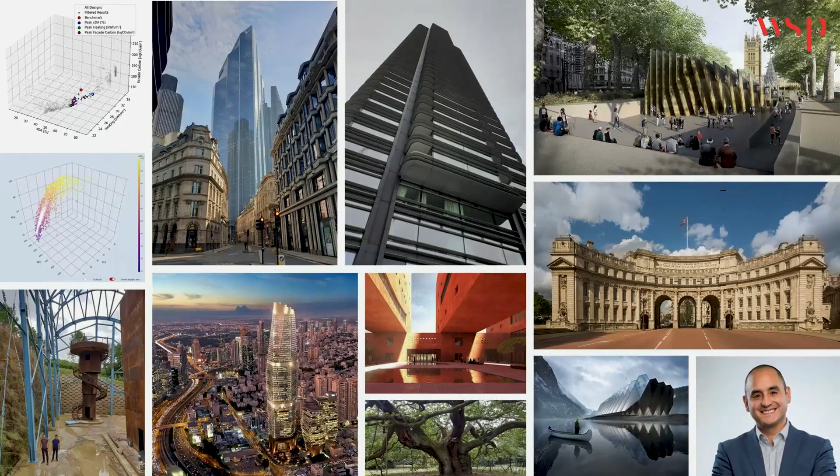A little bit about myself. I'm a structural engineer. I work on tall buildings in the UK and in the Middle East. My experience is very diverse, different types of buildings, all the way from the most complex to the smallest projects.

At the bottom of your screen, you see a tiny little tree. That is possibly one of the most challenging projects I've worked on. It is a 1,000-year-old oak tree in Liverpool that needed propping and supports to make sure that it could stand up for the next 200 years. And that was more complex than any tall building I had ever designed before.

For the last 5 years, I've led WSP Structures decarbonisation efforts. So we realized that the real impact that we could make as designers was in the emissions from the buildings that we design. Everyone is focused on their own carbon footprint. This is what we call a carbon handprint - what you can design for a client. We realized that that is where we could make the biggest impact, and I've been leading that.

One of the things that we created as part of this journey is a process, a digital process that I'm going to show you today. And then that got me into creating tools to decarbonize our buildings and to help engineers create better buildings and do better processes.

And that is how I got into automation and AI. So hopefully today I'll tell you a bit about all of those things so that you can see how automation, AI are already changing our industry. It's such a fascinating industry, and it's incredible because we can really make a difference. The buildings that we design, the buildings that we create, they change cities, they change people, they change lives, they change us in return. And it's important that we realize how impactful this can be.

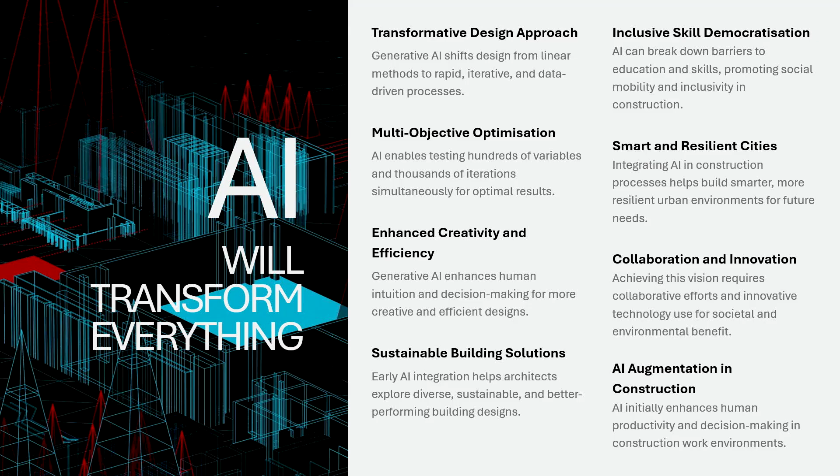At the same time, it is something that will democratize access to skills, because more people will have access to similar skills, which means that we can build things together. So it's something that is already changing how we do things, and we have to embrace the power of being able to iterate and optimize something at an early stage. Today, during this talk, I'll talk to you through how we are optimizing buildings from an early stage to create the most efficient solution. It's going to change how we build things as well.

If you combine the power of automation, the power of AI, and the power of robotics, we could really challenge all those construction paradigms that we have right now. I once read a really interesting prediction that someone said that by 2040, we would have robots with human dexterity at the price of a microwave. If that is true, then that means that the construction industry will be completely transformed, since we have that different workforce that can do buildings in a different way.

The challenge, though, is how do we respond and how do we adapt quickly enough, but also making sure that these changes come with consideration to people, consideration to the processes that we follow, to health and safety, well-being, etc. It's important that we remember that when we think about automation and AI, we need to think about upskilling, not de-skilling. So thinking about AI as a tool that can help us enhance our intelligence, which is why today's talk is called Augmented Intelligence. It is about people, and it's about augmenting what we can do to deliver better projects.

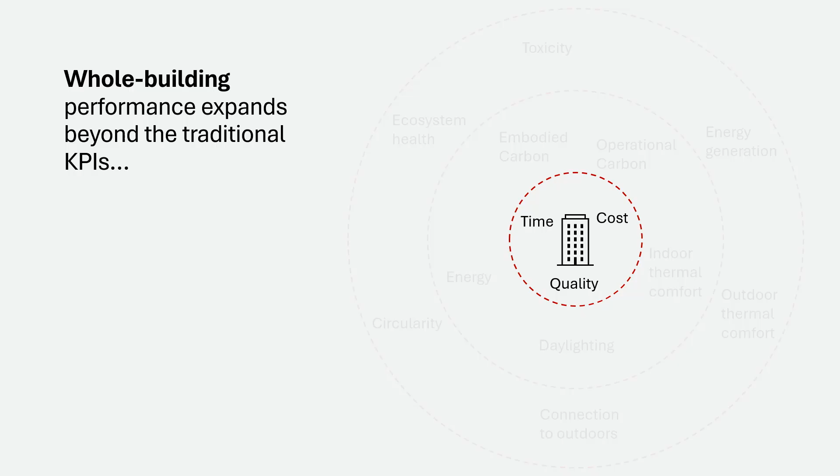Let me tell you something. The current context in design and construction has to go beyond that. Our clients now expect buildings not only that have good quality, that can be delivered in good time, and also have a cost that is good.

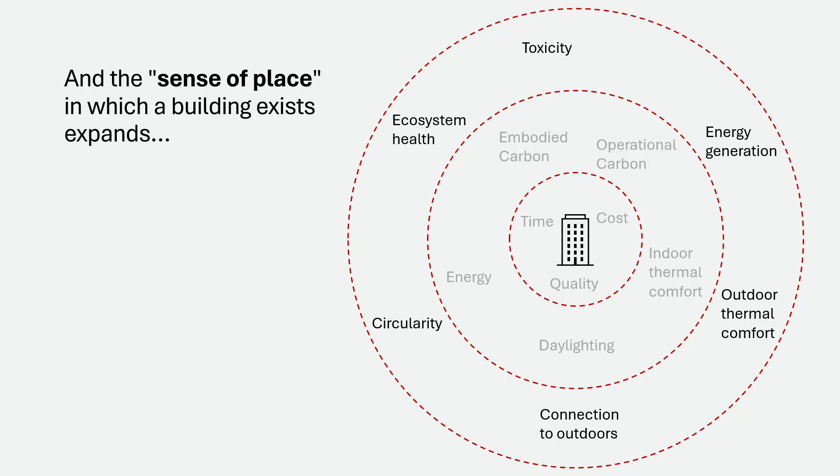They also expect us to perform in terms of other building scale KPIs, such as embodied carbon, operational carbon, building performance items. But even beyond that, which is about place-making concepts such as circularity, thermal comfort, and connection to the outdoors. Our clients are expecting us to create buildings that achieve all of those KPIs simultaneously, and they are all interconnected. That is the challenge of building design.

I'm going to pause here for a moment to ask you a question to think about when you think about building design. I know you might not be designers, but just pause for a moment and think about what would you do. If you have the same brief, let's say a 20,000 square meter office building, and you are an architect, and the client's brief is design the building with the best amount of daylight.

That is one challenge. Now, some of you will be the structural engineer. Think about being the structural engineer, and the client's brief is, how do you design the most efficient building in terms of concrete, the least amount of materials? And then some of you might want to choose to be the mechanical engineers. Your objective is to optimize this building in terms of energy consumption.

Now, think about, if you are optimizing in your role as an architect, structural engineer, or mechanical engineer, your idea is to optimize those parameters. What will the building look like? So think about that for a few seconds whilst I run this animation.

That is what we did. So we created 3 separate algorithms. This is all about introducing augmented intelligence into the design process. We created 3 algorithms to optimize buildings for those 3 parameters, 3 performance indicators. And of course, as you might suspect, the results are completely different.

And this was the eureka moment, when we realized that if you look at the building on the left, it looks like this because to optimize daylight across the floor plan, you have to have a narrow floor that you can get daylight into the depths of. And because you want this narrow floor plan, you will have to build up, and then you have a tower. It looks like a tower.

If you are the structural engineer and you want to optimize in terms of materials, the one on the right is the one that will use the least amount of concrete. Shallow foundations, it is almost like a campus-style building. But is that good for daylight? Surely you don't get any daylight in the center of a floor plan. And it's not very good for energy either, because you get all these solar gains on the roof.

And if you're optimizing only for energy, you want to isolate the building completely from all the elements. So then you end up with a basement box, completely isolated, no thermal losses. But this building is not very good as a building. It's not very good as an office building. It hasn't got very good daylight. And in terms of embodied carbon, using concrete, basements use a lot more concrete, a lot more materials than the other options.

So what this is showing us is that the design process, if done in isolation, if optimization is done in isolation, it leads to different outcomes. That means that the three main disciplines in building design, architecture, structure, and building services, constantly pull in completely different, completely opposite directions. That is the challenge of building design. How do you bring these disciplines together?

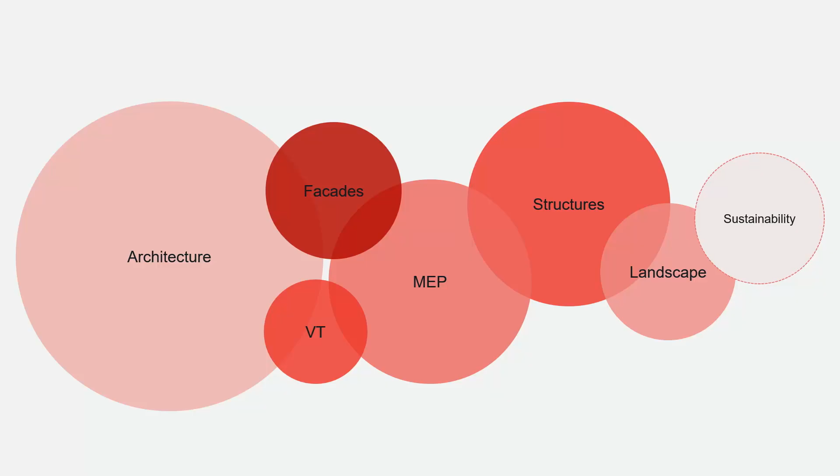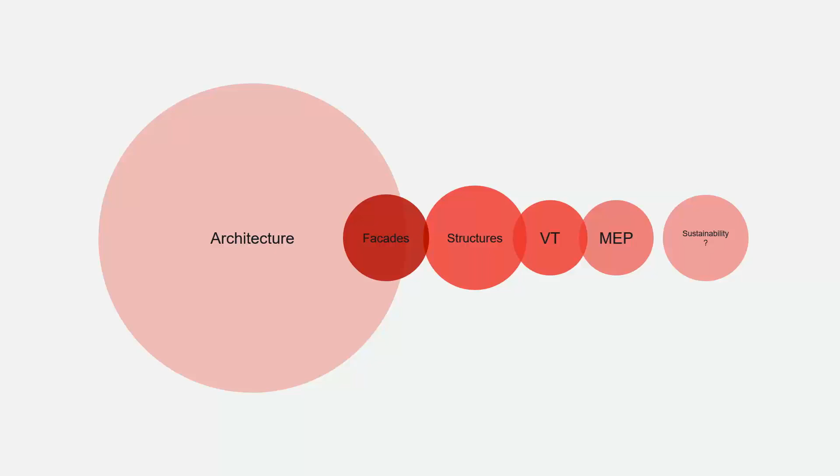A typical design process looks a bit like this, where one discipline comes before the other ones. And this is why buildings look the way they look, because decisions are made almost in a sequential way, and one decision follows the other. Actually, normally, it looks a bit more like this, where one discipline is the central one that drives most of these decisions. So with this linear decision-making process, trying to optimize a certain variable is actually a real challenge. And when you try to optimize one, you might find that the others actually are impacted negatively.

So what is the solution? So what we thought as a multidisciplinary design firm was, we need to optimize buildings for more than one variable simultaneously. And this is what led to this transformation. This is what we created a couple of years ago that has really changed how we design every building. We combine those three algorithms. And those three algorithms are now testing for each combination.

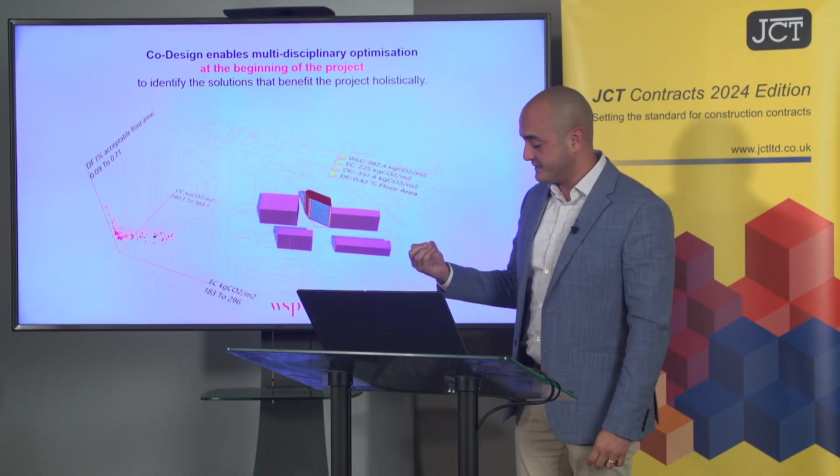It's generating a different massing, a different shape for the building, as you can see on screen—different shape, different type of window, different size of window, different orientation. Every time each of these volumes or buildings is created, you can evaluate performance in the X, Y, and Z axis.

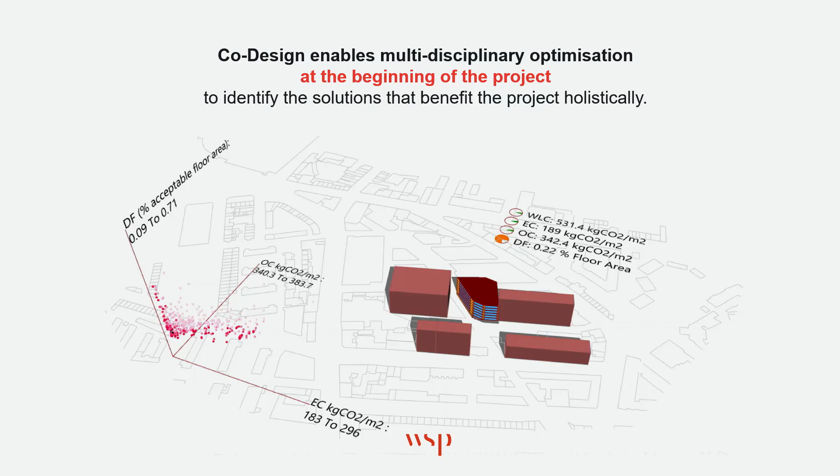In this case, the three objectives we defined were embodied carbon, operational carbon, and the amount of daylight. So we're evaluating a building simultaneously hundreds of times, and this is the key difference. Traditionally, during concept design, that's when we have the least amount of fees, which is why there isn't much science and engineering going into the design process.

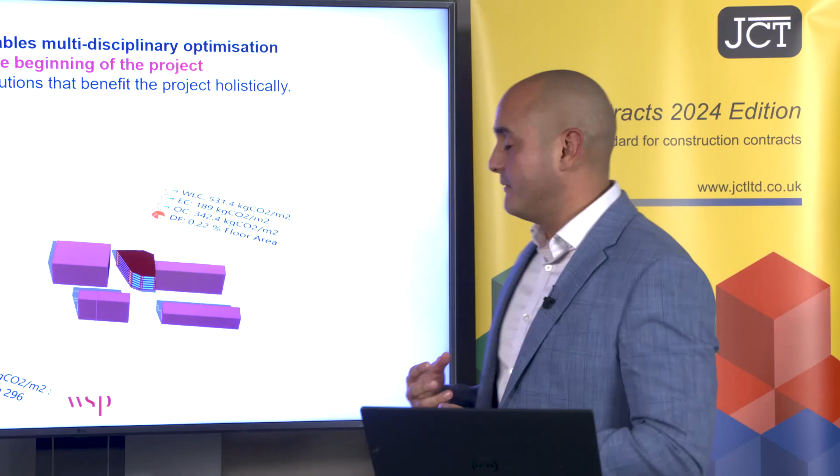So that is restrictive. But with the power of automation, AI, and a few machine learning processes, we can streamline this and create thousands of points of data at an early stage. Each of the dots you see on the bottom left of your screen is a different building that was simulated and analyzed for these parameters—not to the level of detail of a completed building, but to a level good enough to give an indication of how the building will perform for those indicators.

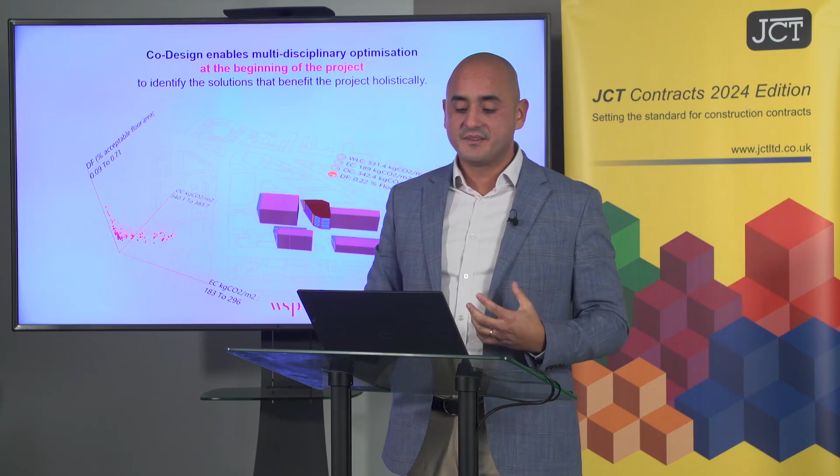And then we bring this to the client and help them see how, by filtering those results, you can achieve the performance that's expected from the brief. Now you have a variety of buildings that can do that. This is what we call the co-design framework.

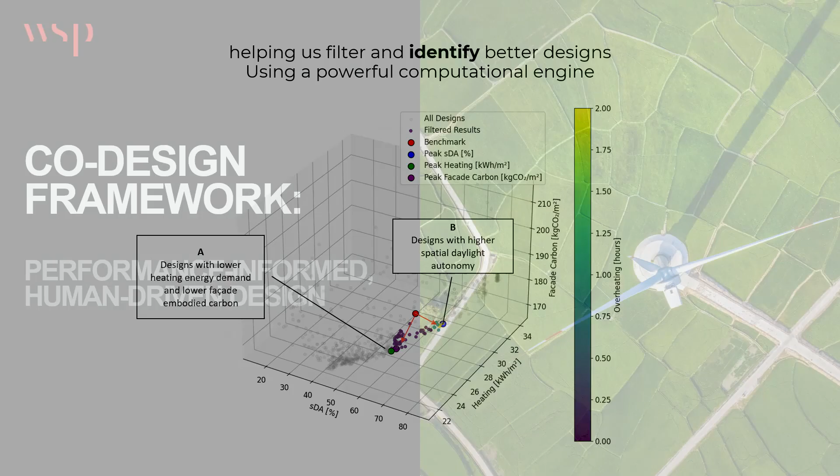The co-design framework is the fundamental behind a design process that is performance informed. This is the key difference between what we are doing now and how concept design was done before. Before, concept design was typically a professional having an idea, coming from experience or judgment. Now what we're using is supporting those ideas with evidence.

So if you allow me to read this, because it's a bit of a mouthful: co-design is a systems-level integrative design approach that unites multiple disciplines to collaboratively address the complexities of whole building performance. In summary, it's about the entire building—not just one discipline, but all the disciplines—and it's about integrating them to evaluate simultaneously and improve the performance of the whole building.

I know it sounds obvious, but it's actually something transformational. And it's founded on three principles: first, multidisciplinary collaboration; second, early stage asset simulation; and third, evidence-based decision making.

In other words, more than one discipline—building services, building structures, architecture. Simulating, so it's not just about intuition and experience, it's about actual computer models that give you the performance of a building in different situations. And third, using all of that data to truly make better decisions.

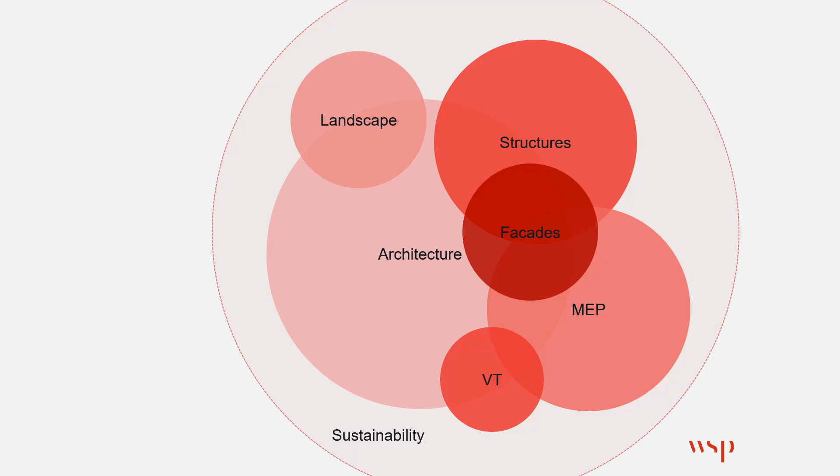So how do we apply this in practice? I'll show you a few designs. The reason this is interesting is because sometimes the impact of one variable on another is not intuitive, and you'll see this—hopefully you can follow me on this simplistic example.

Let me click. So the client's brief was: I have these apartments in this tower and I'm struggling because the daylight assessment for planning is telling me I need bigger windows. And if I create bigger windows, I'm letting more radiation from the sun come in—brilliant for daylight, but not brilliant for overheating, because the apartments are overheating as the temperature inside goes up. That means I'll need to introduce mechanical cooling, air conditioning into these apartments.

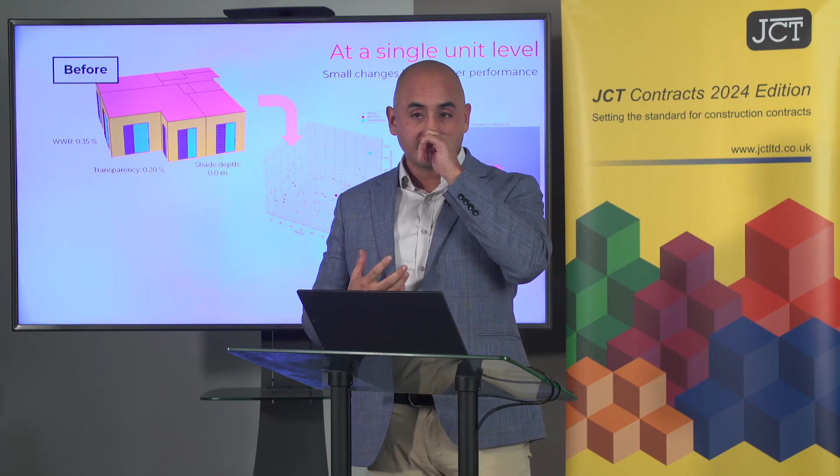So it's outside of the brief. The solution is to increase the window size, but also put a film in front of some of that window so we can reduce those solar gains. So it's leading to a perverse outcome, because you're increasing something that's supposed to be good, and then covering that with something that's not so good. And it doesn't converge into one acceptable solution. So they asked us, please help us solve this puzzle.

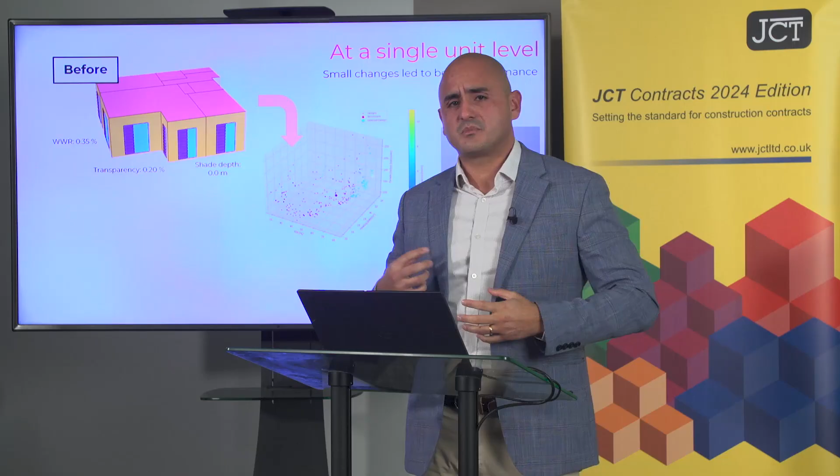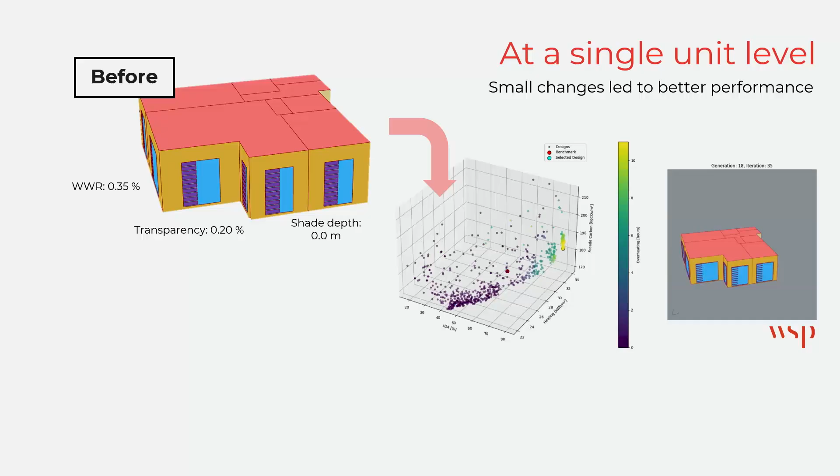And that is why we created the first analytical model, where we evaluated each of the windows as a different variable—the window size, the depth of the threshold, the type of glass, the type of shading, etc. Each of these iterations you see on screen changing represents a dot in the graph of performance with these three axes plus a fourth one. So we are evaluating four parameters, four criteria at the same time. And the result and advice we gave to our client was actually not intuitive—it was contradictory, the opposite of what someone would have said.

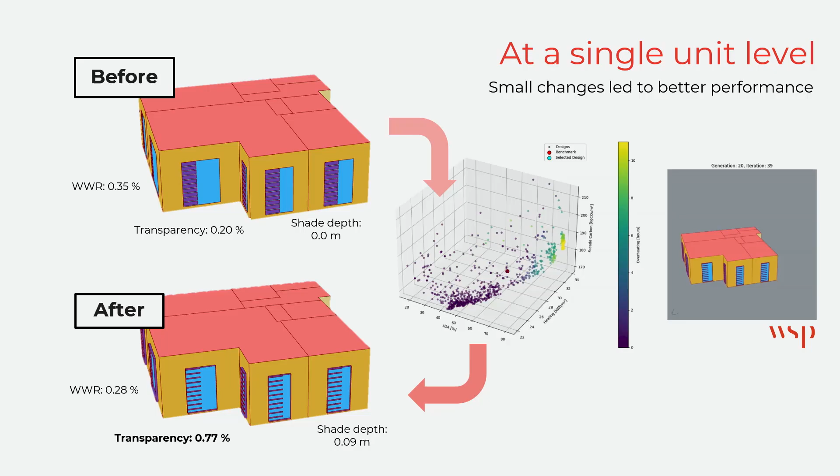We said, actually, you don't need to increase the window size, you need to reduce it. By changing the type of shading from film to a different element, like louvers, you'll get the same or more daylight and reduce overheating. That is a result you would never arrive at following the linear process, because it determines that one consequence follows a certain cause, and never leads to the iterative approach we achieved here.

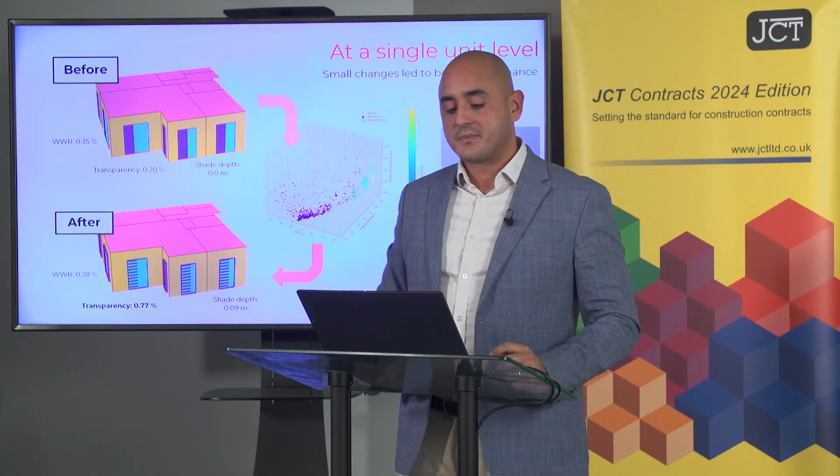So the client was quite happy, and they came back to us and said, help me with this other tall building. I'm also struggling because we want to have as big as possible windows across the entire perimeter.

So we took one floor of a 40-story tower in London. We created a parametric model where each element—the type of balconies, the shading elements, the size of the window, the thickness of the windows, the type of glass—represented a different parameter, and we created hundreds of points of iteration and evaluated them.

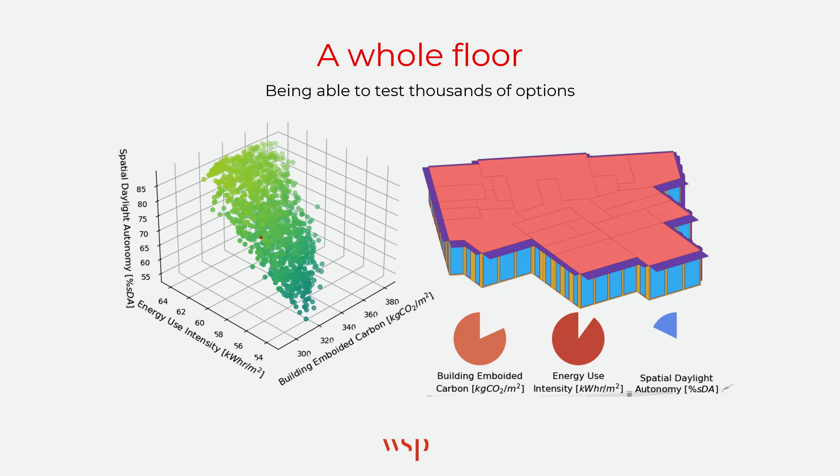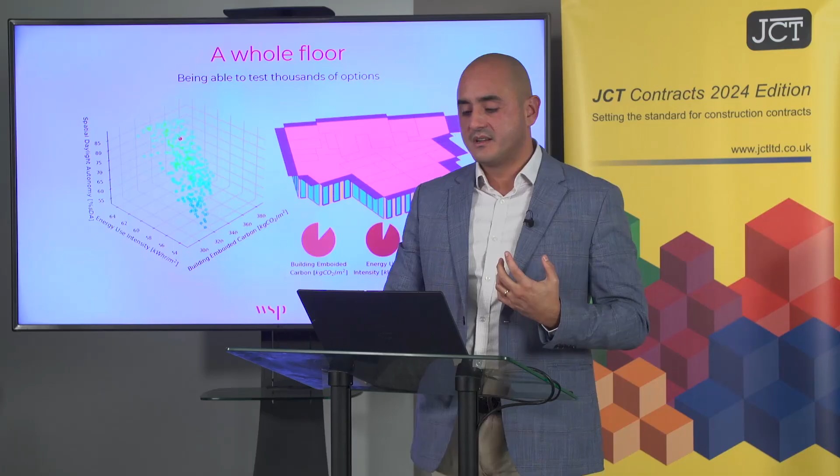In conceptual design, you typically have 2 or 3 options that the design team evaluates, then you choose one and carry it forward. What we have now is 1,750 options, all covering what we call the design spectrum.

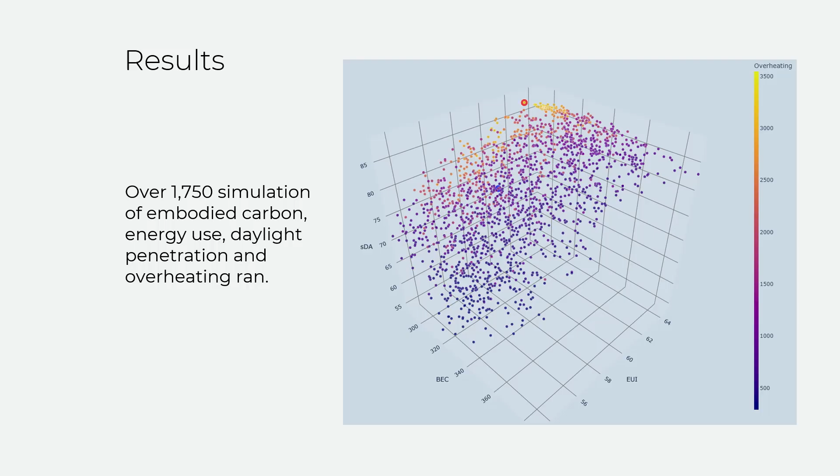With all that data you can train a machine learning model, because you can extrapolate and interpolate to fill the gaps and complete the surface of the design spectrum. In the past, design was 2 or 3 options based on the architect's intuition, the engineer's experience, and the client's needs. Now all of those decisions live in this surface of possibilities.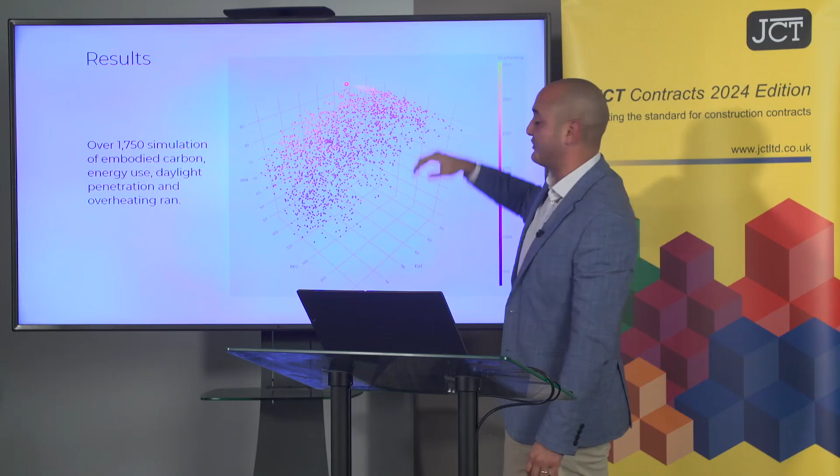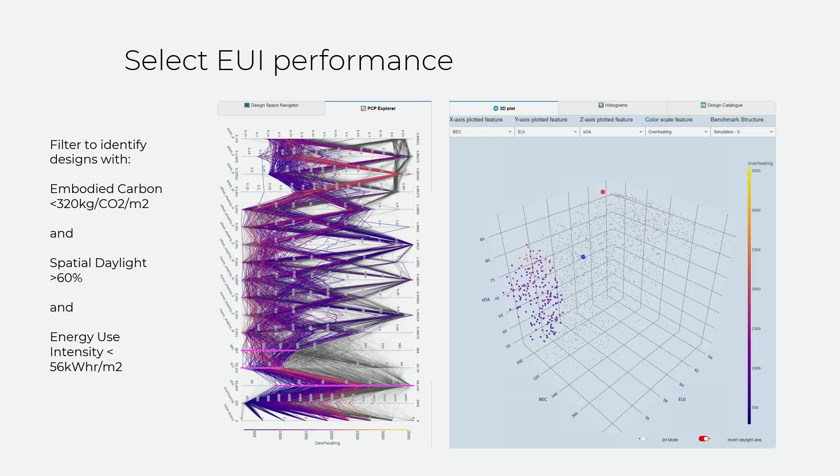We help the client by filtering those design solutions. On the next screen you'll see how we start filtering—first through performance along the x-axis, then performance on the y-axis—until we achieve elements that meet the brief. All those dots meet the performance brief on every axis, and we can see how different they are from that blue dot and that red dot.

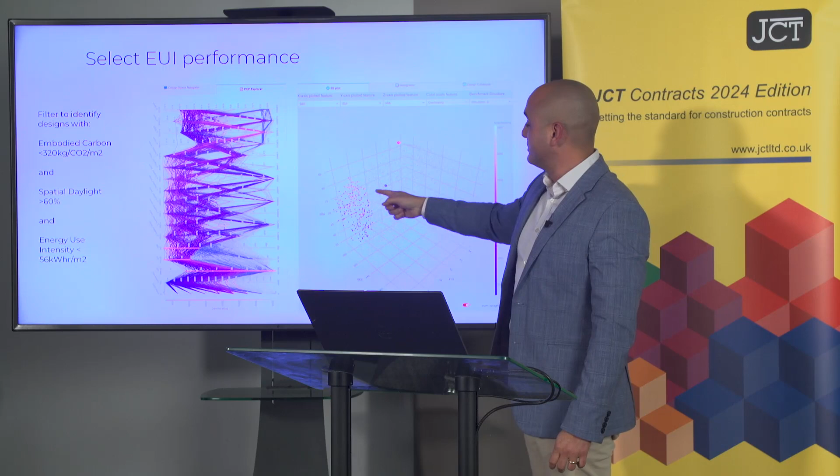The red dot was the original design by the architect. The blue dot is what we ended up with, because we had to make the conscious decision to compromise some of those. The interesting thing is that building design now becomes a process where you start with the most efficient possible solution, then make decisions to achieve what you really want.

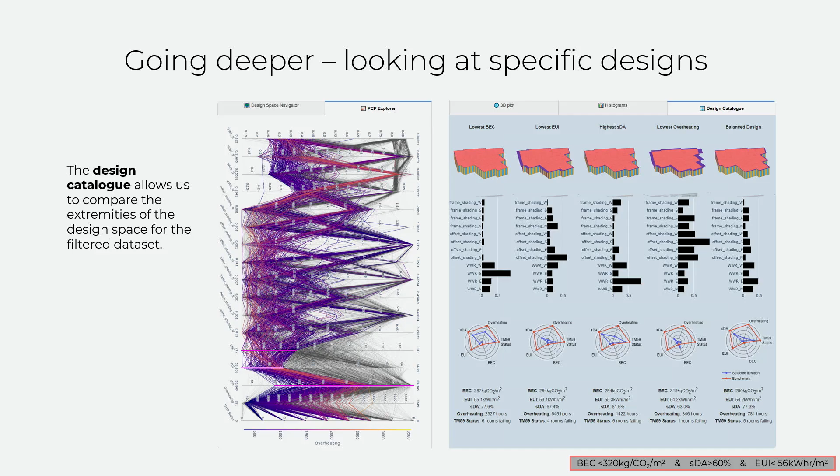We're supporting clients by giving them all of these tools and creating a catalog of the interventions needed on each facade to achieve that. That was a very successful project, and we ended up using a combination of different types of facade, shading devices and balconies to achieve the balance that led to that blue dot.

That was the solution chosen by combining all of this evidence, which is why it's called evidence-based design. It's called human-centered because humans make those decisions, and it's about how those decisions affect thermal comfort and how we interact with the building.

This is how we see the future of the industry, by creating designs that respond to a combination, an optimization of different processes. The next example is similar, but bigger. In this case, the client already had a master plan with a group of buildings.

It taught us that typically when you design a master plan, other decisions come first—such as where roads are, so you have to respect the infrastructure. The buildings couldn't really change their shape or position; the only thing we could change was their height.

The client came to us and said, how can I optimize these buildings? I'm struggling with the amount of daylight in some of the buildings, and with the costs of operation because it's leading to a massive amount of energy. I want to reduce the energy used, increase the amount of daylight, and reduce the potential for overheating so I don't need to introduce air conditioning or mechanical cooling. How do you find that?

So we asked them, what can we play with? And they said the only thing we could play with was the height of the building.

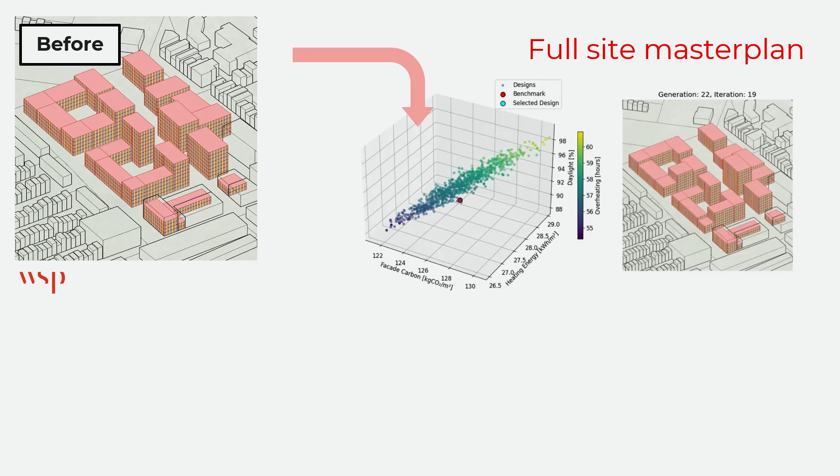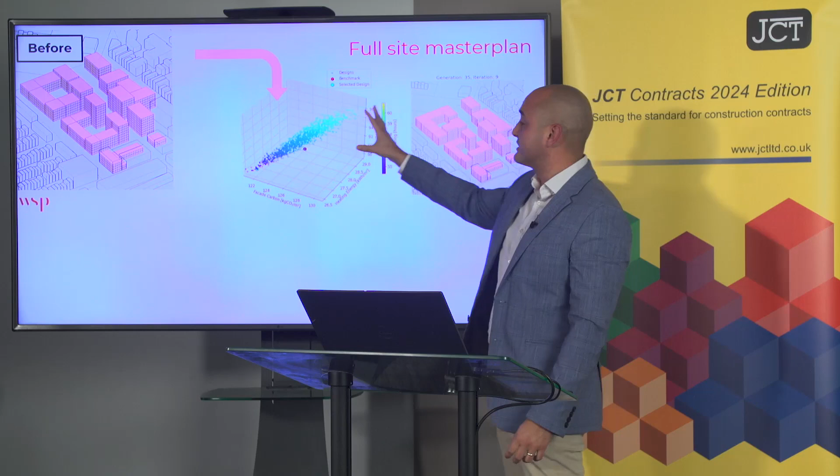So this is why we created what you can see now on screen. It's a model that plays with the height of each of these buildings. Every time it varies the height, and it doesn't vary it randomly. It uses a genetic algorithm to find the best combination after each generation, which is why you can see all of the results combined in a group that makes sense, not just completely dispersed, because the algorithm is pointing them in that direction. And then with these hundreds of different options, every time there's a different building height, we evaluated all of those parameters.

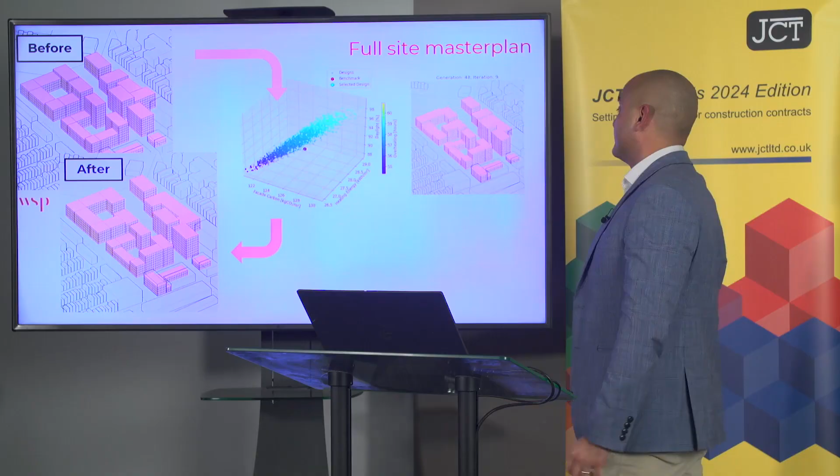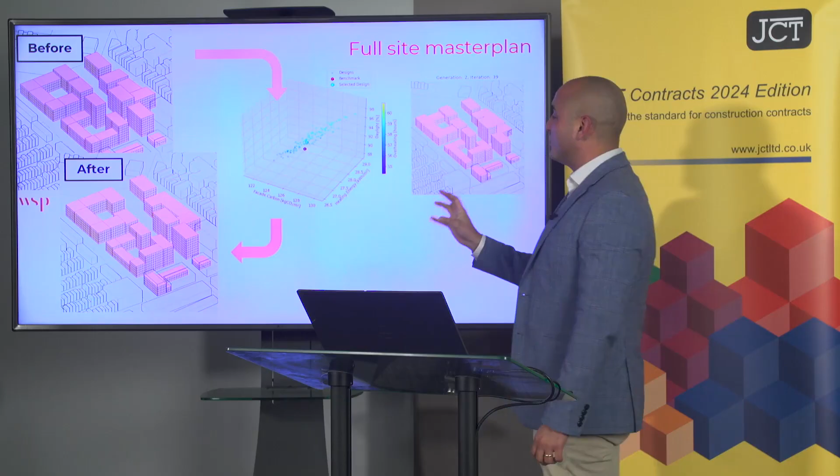The conclusion from that assessment was actually quite similar to the original design. It was just a few minor tweaks that you can possibly just barely see here on the left. That building is a little bit shallower, lower than that one. This one is higher, etc. Small changes that led to better performance because we could analyze the interaction between those buildings.

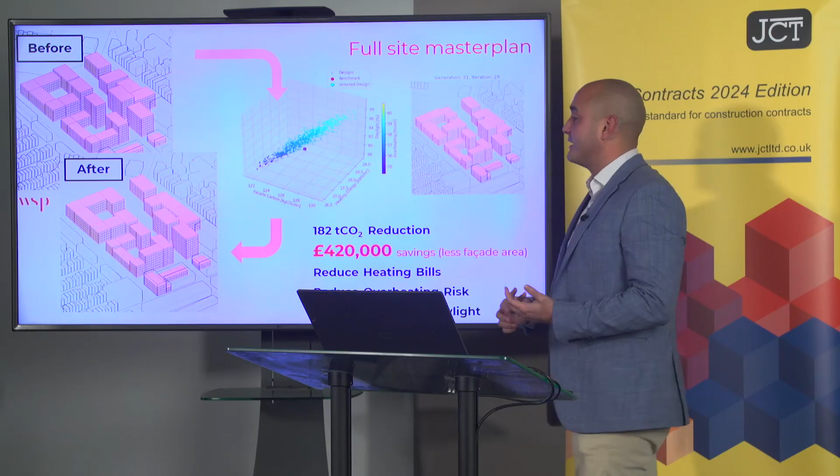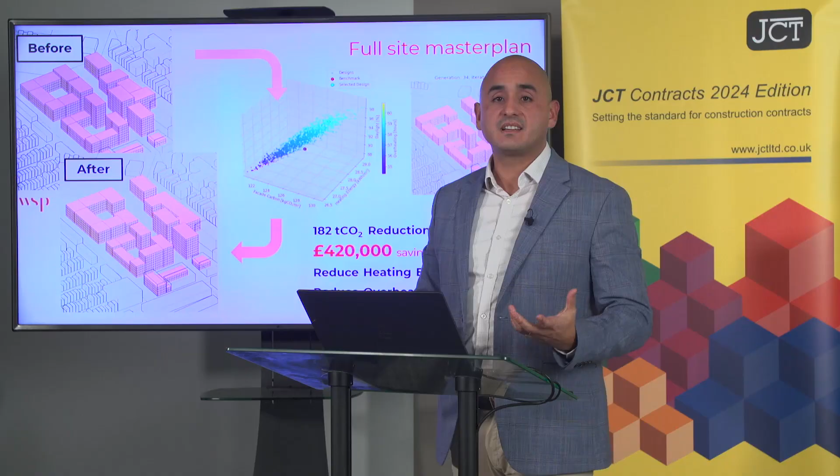We reduced the operational energy, the operational carbon of the building, but actually there was an unexpected win as well, a parameter we didn't think about, which was the overall surface of the volumes, which translates directly onto area of glass and facade. We managed to reduce that, resulting in nearly £420,000 of savings because they had to build physically less surface of building. So that saving was many times more than the cost of this assessment.

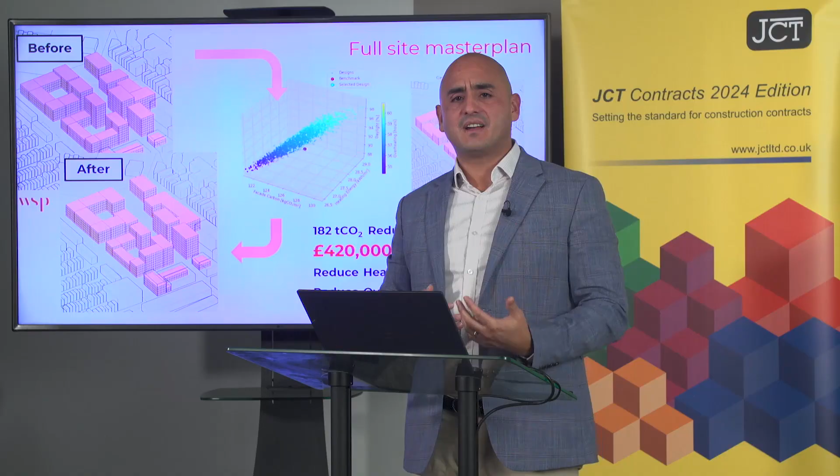And that is what really adds value to a project. At an early stage, being able to optimize a building to that level of detail was absolutely transformational.

So then this client came back again to us and said, now I want to do this, but looking at every single apartment. So that is one of those buildings in the same complex, and they wanted to look at what happens with each apartment. So we created a parametric model for each apartment, each cluster of apartments.

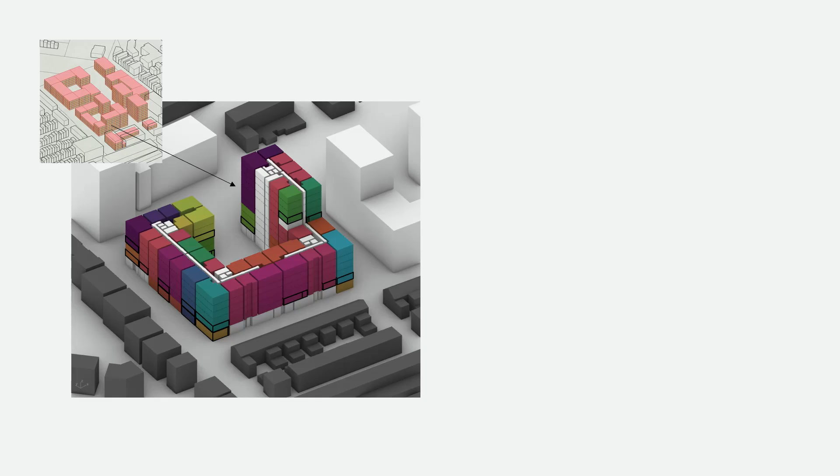You can see the colors mean a cluster. Some of them are north facing, some south facing, some in corners. So depending on where they are, they had a different category of apartment. And we created all of those results, and then we can analyze them all.

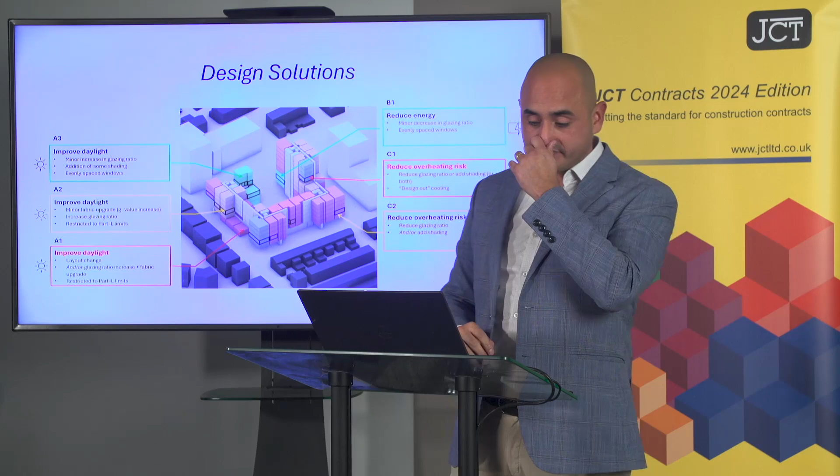When do we have the opportunity to introduce savings like this? It's typically at the end of stage 3, when we want to do some value engineering. And by then, the amount of value engineering we can really introduce is not that great, because all of those big decisions, like the height of the building, the orientation of the building, were already made. So through this analysis, which was done at a really early stage, at concept stage, we managed to determine different interventions for each type of apartment.

To improve daylight, changing the window sizes. If it was a west-facing apartment, it was a different intervention. But for me, and it's going to sound very geeky, and maybe not everyone will understand what I mean, the most interesting intervention that we came up with was not really related to the window size or the amount of daylight that apartments would receive.

We realized that, for example, north-facing apartments, which you can see here in red, were always failing because they were not getting enough daylight. And if we wanted them to achieve enough daylight, the windows would be so big that they'd lose too much heat in the winter, and the heating demand was much higher. So we couldn't really find that optimized solution. We realized that there are limits to optimization.

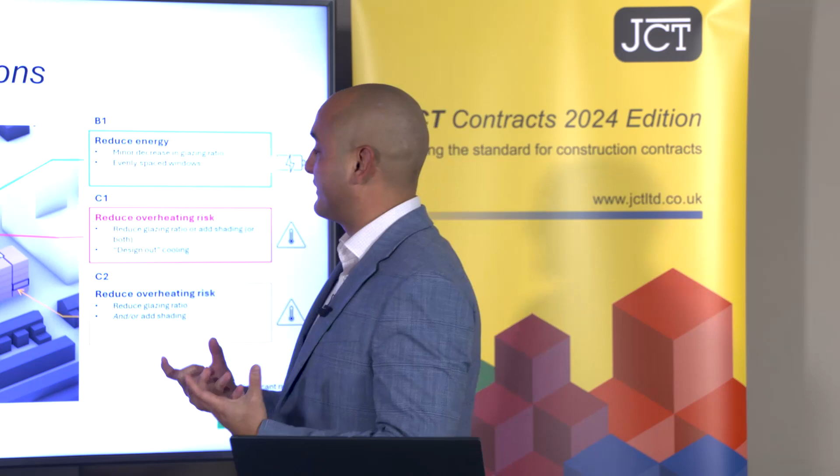And that led to, for me, a revelation, because we said to the architect, actually, what we need to change is the apartment itself. All of these apartments are typical apartments for the UK. And we realized that the ratio of a one-bedroom apartment that is almost like a square didn't really work.

So we suggested to the client to make those apartments less deep, more shallow, so that more daylight could penetrate the depths of the apartment. It would meet that requirement without having to increase the size of the windows. Now, I know it sounds very specific, and maybe not everyone in the audience will understand what I mean.

But for me, it was about realizing that whilst you assess some parameters that are within your control in a building, having the possibility of evaluating performance at an early stage made us realize that the parameters we had were not the right ones to be assessed, that we had to influence the design of the building even one step before that, which is the type of apartment.

And that just shows how important it is to look at early stage design through the lens of automation and a bit of AI. So that is what we call the new design paradigm.

Because currently, building design is about this dream. We all have the dream of a building, the architect's dream, the client's dream. And then we spend the entirety of the design process incorrectly called, in my opinion, value engineering. Because we're not really adding value. We are de-specifying, we're removing cost until we get to the product that we can afford.

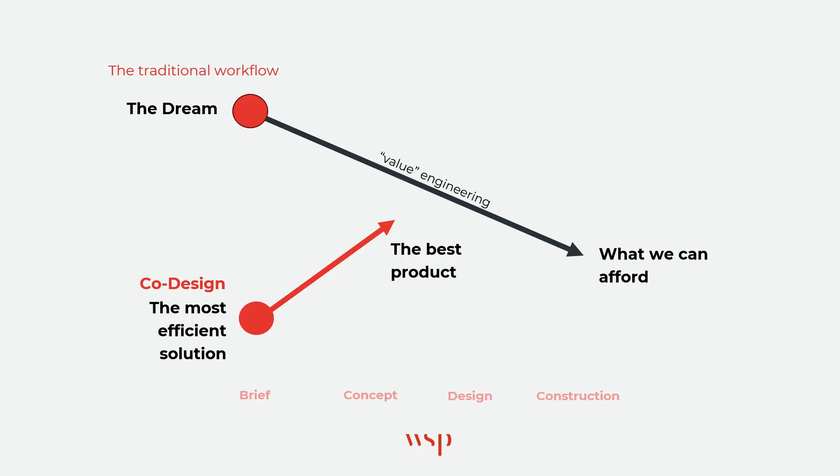And even though you're increasing those elements, this best product will be better than anything that you can achieve through the traditional design process, because you're starting with the most efficient. That is how we want to change the industry, and I think that is one of the most fundamental impacts of automation and AI.

And just to wrap this all up, how is this going to happen in the design industry? And of course, that is directly relatable to the construction industry. Well, the first thing that I need to answer before someone asks the question is that we're not replacing engineers or contractors with ChatGPT. That is not the idea, because those tools are not meant to do what we do. They do something else, and we should use them in the best way possible, but they're not simply replacing us as they are.

What the challenge that we have in the design industry, and this applies to every industry, is identifying those processes that we currently do that include as part of a building design. In my industry, structural engineering, they typically are calculations, modeling, detailed design, reporting, drawing, and creating construction documents. All of those can be automated. The challenge that we have currently is connecting them.

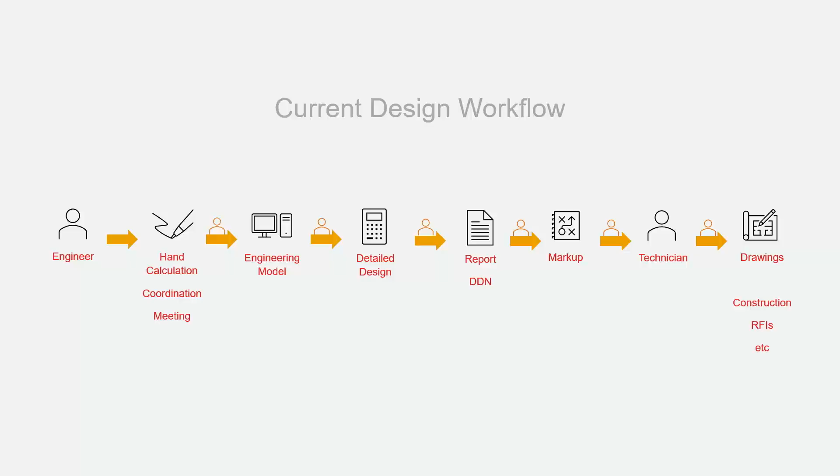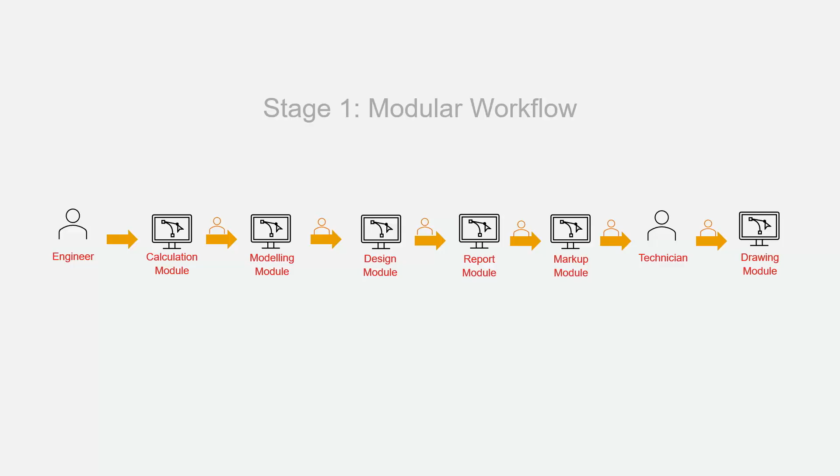So how do we connect those different tools into something that makes sense? Currently, we use spreadsheets. We export data from one system, one software to another, and all of that introduces sources of error. How we see the future of automation and AI in the design industry is first by creating bespoke analysis packages that can help automate each of those tasks.

For example, you've got one which is the calculation piece, another one which is the geometry and coordination piece, another one which is the reporting piece, another one the drawing piece.

And then following that, we connect them using AI agents. And this is what AI is really good at. It is about connecting data and transferring data and transforming data in an accurate way, and in a precise way and in a fast way. This is how we see AI changing the design industry, by helping us connect all of those processes.

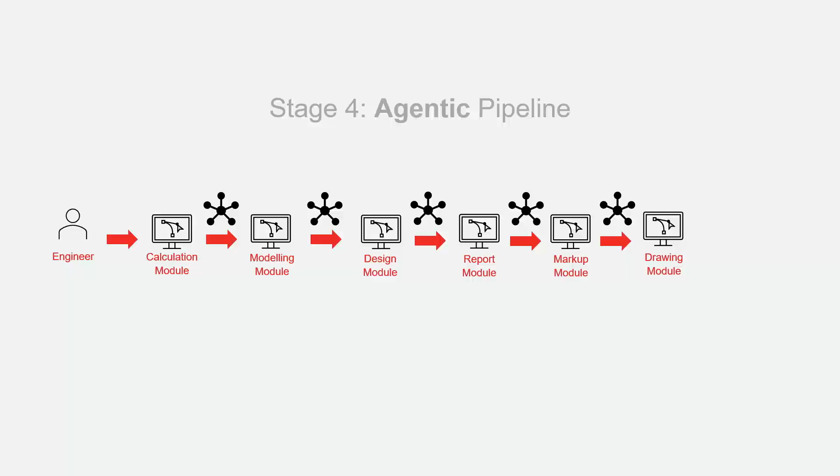And once we successfully connect those processes, when we achieve what we call a digital colleague, an engineer that is supervising a process that has been partially automated and connected through design agents. And when you combine those digital colleagues, that's when you achieve a digital design team, which is the ultimate goal.

To make sure that engineers have access to these tools, to put them at the center, which is why the talk today was called human-centered. It is about putting the engineer, the designer at the center, having access to all these different tools so that we can, through analysis, through simulation, through early stage evaluation of buildings, we can really augment our intelligence and really transform how buildings are designed.